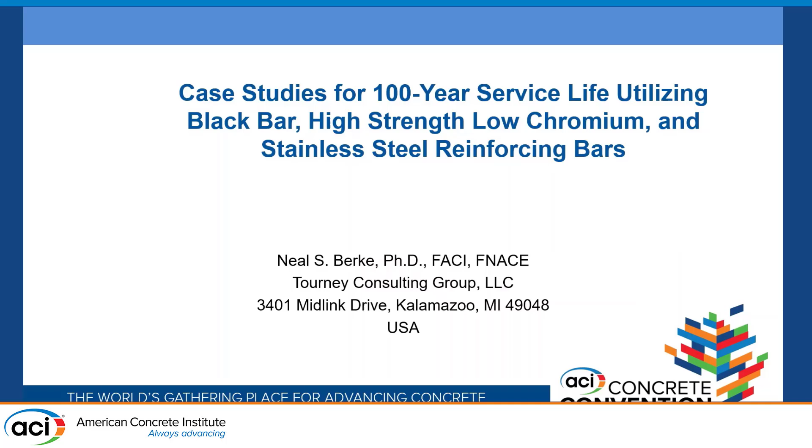So anyway, I'm going to talk about another aspect of Mike's work, where he worked on changing some of the bars that get used in the state of Virginia. And of course, some of these guys in the front row there did a little bit of work on that too. But I also spent a lot of time with Mike on other things.

So I knew Mike for over 30 years. It's close to 40, but I say over 30 because it makes me a little younger. And he was always trying to do his best for the Virginia DOT. I would come in. I worked for an admixture company. I was probably a snake oil salesman, coming in the door. But he listened, and he gave his concerns, and we had good discussions. And I've always appreciated that.

And like I say, if you came in with a new technology, he didn't throw you out the door. He just said, okay, show me how it works. Let me see how I can test it and see how it works. So he did a lot of testing, and he did a lot of looking at it. If they worked, he would use it, but only if it made sense for Virginia. Just because it's a fancy new technology, if it wasn't cost effective, it didn't make any sense to do it.

So I think he always had the state in his thinking, and I think everybody I know that worked for him really liked him too, which I think is important, because I never heard a bad word about him. I knew him for a long time, and I'm good friends with some of the guys that worked for him, so they would have said something if he wasn't a great guy. He is a great guy.

But as also mentioned, he shared his knowledge through participation. He didn't just stick to Virginia. A lot of people can stay happy in their company and not do anything. But no, he took an active role in ACI, which is why we're having this for him at ACI. And he also was very instrumental in TRB, as mentioned. From hearing many of his presentations and talking with him, I learned a lot, and I think that was the best thing about him. He was a great guy, and he made sure other people got a hold of his knowledge.

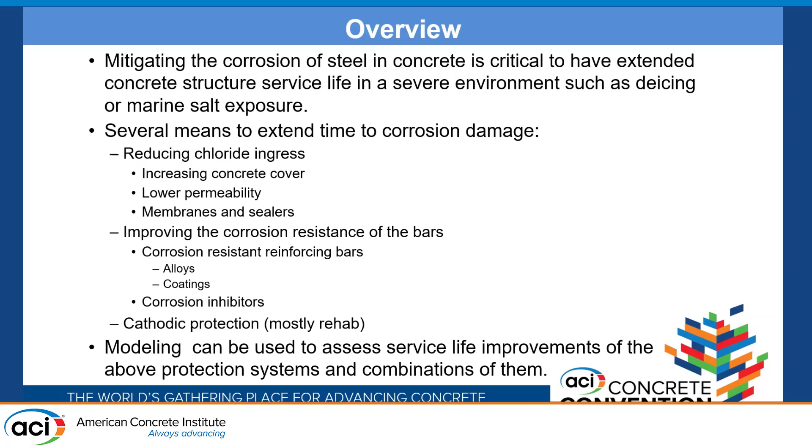You'll have membranes. You'll have higher performance concretes. You'll have corrosion-resistant rebars. You'll have inhibitors. You'll do the whole kitchen sink, because this is a monumental structure. In other cases, it's a little county bridge. You might use one or two of them. It's not as important, but Mike kind of knew where it was important and where it wasn't important, which I think is a good thing.

So today I'm going to concentrate on basically black bar as a comparison and chromium-containing alloys for bridge decks. These are the two new rebars that are currently being used in Virginia, depending on the environment, and do some service life predictions, and more importantly, use that to determine economic benefits. Why do you want to spend more money up front to use these things? It's quite apparent when you do this.

A lot of the data, I'm not going to go into how all the data got there, but a lot of it's based on our in-house testing and literature values. For threshold values, we use slightly lower values for deterministic modeling, which I'm using here, but you can use probabilistic models. With probabilistic models, you can get the chloride threshold to be a little bit higher, because they'll cover the lower values due to the probabilistic distribution of the chloride threshold values.

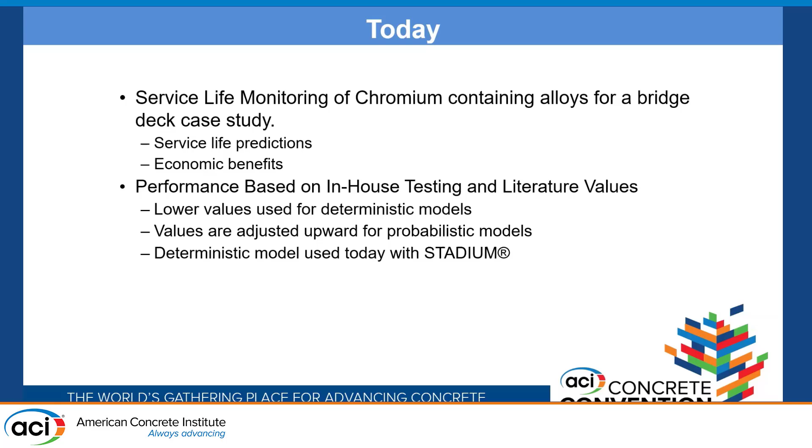And then today I'm using STADIUM. If people were here in Boston last fall, we had a session comparing the various models. If you use the models right and you get the right parameters, they all work. But today I'm just going to concentrate on STADIUM.

So what we're looking at is a black bar, which is normal carbon steel, ASTM A1035, 9% chrome, and another one that's 4% chrome. And the duplex stainless steel in this case was 2304 for this modeling. But you can put anything you want in there once you know the values of what they do, how they behave.

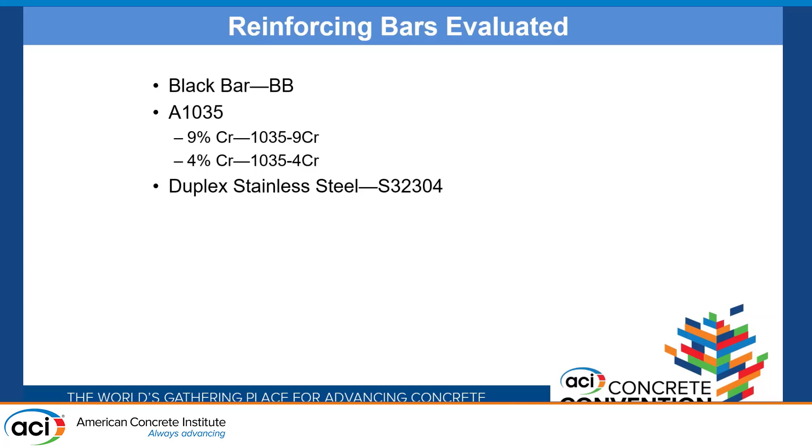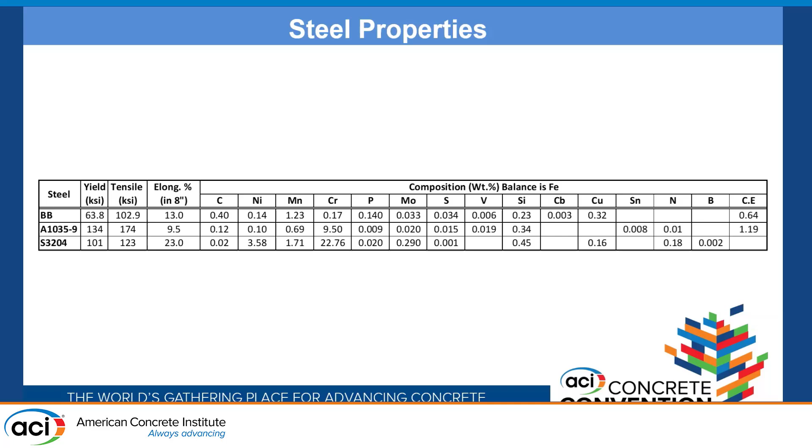The black bar, you can see the composition, no chrome in it, it's an impurity. You get to the 1035, you can see it's up to 9.5% chrome. In this particular alloy, if it got above 10%, then we'd be calling it a stainless steel, so it gets below that. And you can see the duplex steel has 22.76% chrome, 23% roughly. It's got higher other alloy contents in it, so it's a more expensive alloy to produce. But obviously, you do get something for the extra materials in there.

Now, I'm using a Midwest bridge deck as a comparison here. This is some of the data I had in hand, but we did samples with Virginia materials and Virginia locations and all over the country, all over the world for that matter. So it doesn't really matter, because we're trying to show how you go about it. The in-place cost includes cost savings of using less steel for higher grades of strength. I'll mention it now, and I'll mention it a little later on.

Those of you who are designing bridges, if you decide up front that you're going to use 1035 steel or the stainless steel, they have higher yield strengths. If you put that into your structural design up front, you can save some money on the cost of building that structure and give it better corrosion protection at the same time. Often they come in, the structural design's all there, and said, okay, you've got this cover, this concrete, this is what you've got to work with. Well, okay, but you can save some money if you use this in design. We don't want to redo the design, but ideally you really want to think about that.

We're looking at using STADIUM analysis once again to analyze the chloride coming in for 100 years, based on the exposure conditions and literature data from, as I mentioned before, in-house experiments for chloride initiation values for the reinforcing bars. In some cases, they might be a little bit conservative or not conservative, but you can change those as is.

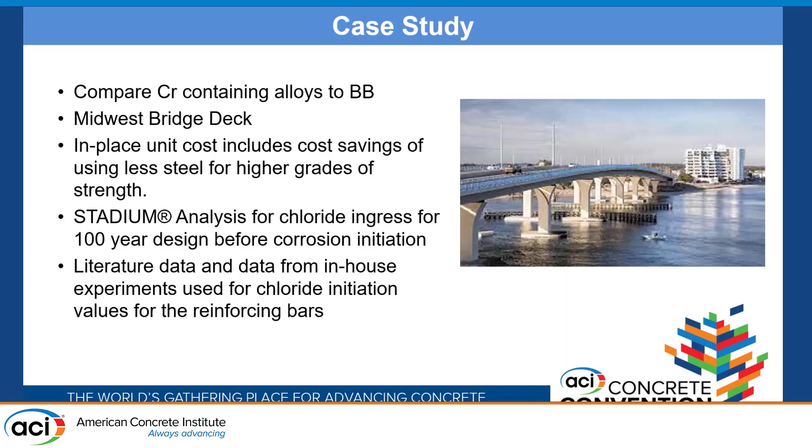So anyways, the first thing we look at is the black bar, and we're using a grade 60, which is the common one, threshold value of 500 parts per million chloride total in the concrete by mass of the concrete, and the propagation typically 5 to 7 years after corrosion starts. That also came from a SHRP study that I worked on with Mike and Richard Weyers, where they looked at bridges and it took about 5 to 7 years after corrosion started to start seeing cracking and spalling on the surface.

So I mean, it might vary from location to location, but that's a good number unless you have local data to say otherwise. And at today's prices, it's roughly 75 cents a pound for buying that bar. It might be more or less depending where you're at, but that's roughly the price.

Now, if you look at the A1035 with the 4% chrome, it has a higher tensile strength, which I showed before. The yield strengths are much higher, so you can use it as a 60, which is basically the same as the control bar. You end up with a higher threshold value, because it's not as good a cathode. It takes longer for it. The propagation's longer, and the price ends up being, on a direct basis,

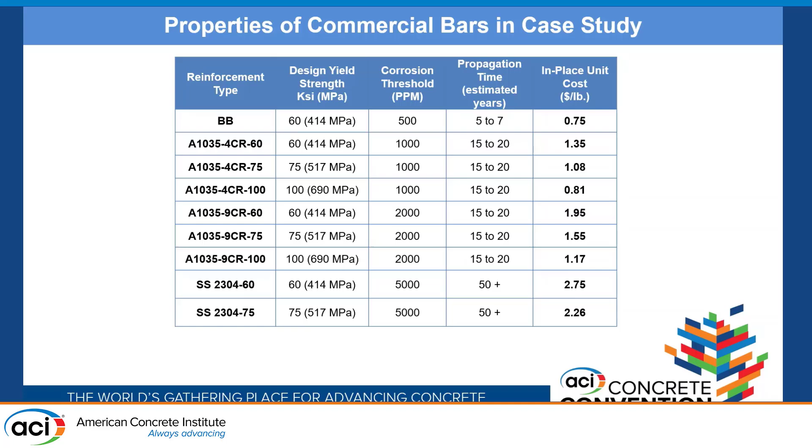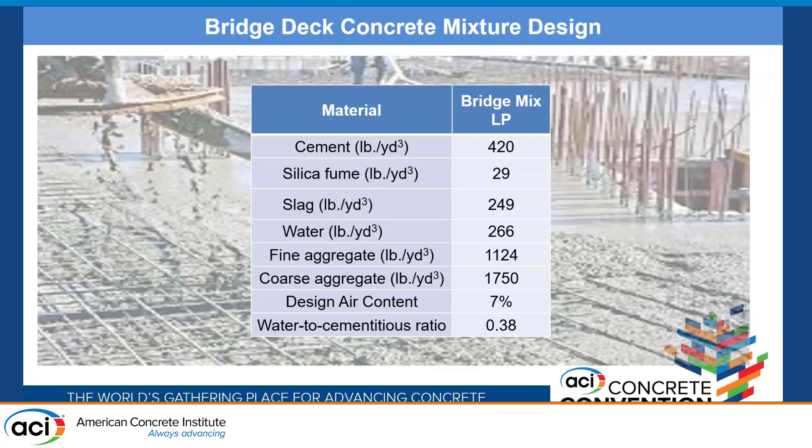So anyway, this is concrete. I mean, I felt pretty bad when I saw that, Mike, cement contents. This analysis was done a little before that. Usually we have it much lower than this now to get the paste fraction down, or they have to use an SRA or something to account for that. Usually it'll be less, but this is an example. Whatever mix you want to put in there, you can do it, and it'll just change the curves a little bit, and you work accordingly. So that's the mix we use.

These are the parameters from STADIUM that we had. That looks like it's a high number, but then it's multiplied by the porosity, and because it's on hydroxide, it actually ends up being a diffusion coefficient in the upper 10 to the minus 13 range, meters squared per second. So it's the same.

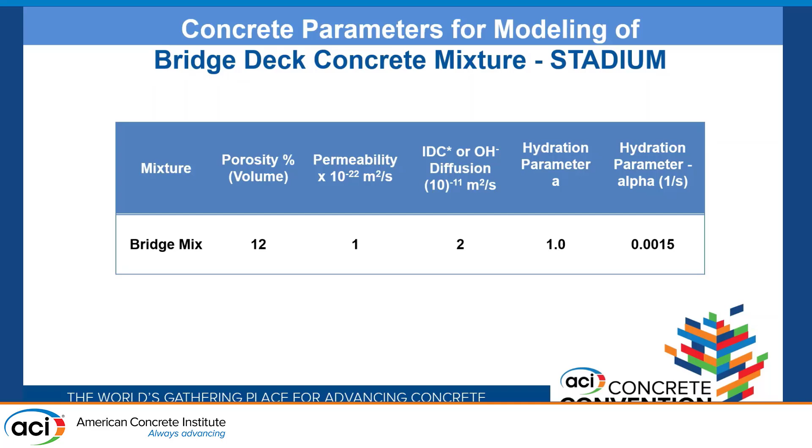So it's just how the modeling handles it. So that's extremely good concrete, and you don't necessarily have to be that good. And then you can see we do that. We come up with

percent chloride on the concrete on the y-axis, and the x-axis is years. And we have various lines. The upper line is with 1 inch of cover, which of course nobody does, but then we go to 1.5 inches, 2 inches, and 2.5 inches, which are more common.

The threshold line for stainless steel is above the charts; stainless steel would not be expected, at least for this concrete in this time period, to have chloride above the threshold value. The threshold value for the A1035 9% is that upper line up here, and other than 1 inch of cover, which nobody would use, nothing is going to get beyond chloride initiation.

I have a line for galvanized here. Galvanized bar would get you up to about there, and then this line here is for the A1035 at 4% chrome. And here's your black steel, and epoxy has a longer life. It has basically the same threshold value, but it goes out a little bit longer with propagation time. But I think as they found in Virginia, it's not going to get you much beyond 70 years, 75 years.

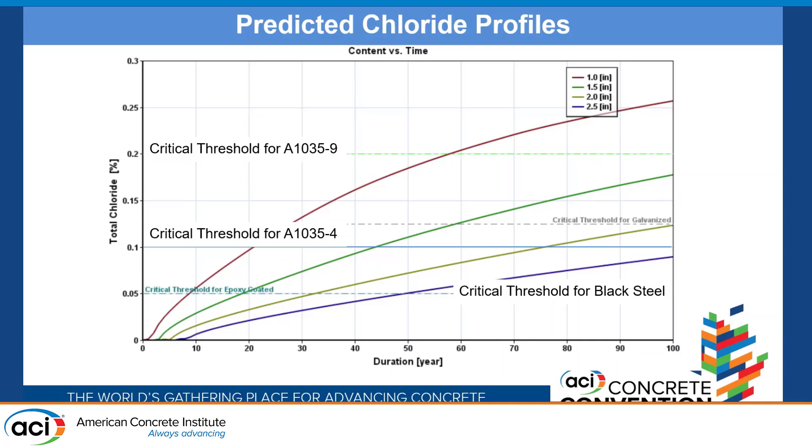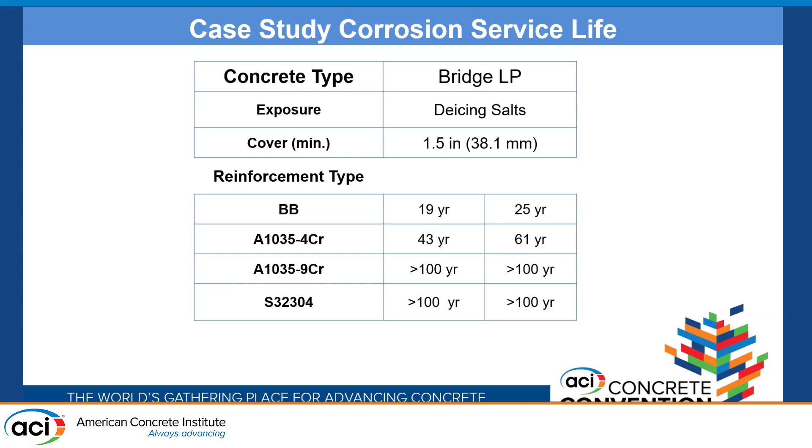Once again, looking at this particular example, the black bar had 19 years, with the propagation 25 years. The 4% chrome 43 to 61, but once again you can increase cover in both of those and get a little bit better performance. And of course the high chrome and the stainless steel did much better.

And you can actually look at the cost analysis on this. So the black bar was 75 cents a pound, but you don't have that much, 25 pounds per square foot of bridge deck. So it's got a low initial cost compared to everything, but your first repair is coming at a relatively early time, and you do a net present value cost analysis in today's dollars, and it's $12.91, and you add up all the other repairs in that 100-year lifespan, and it ends up being $46 a square foot.

The 1035 at 9%, with no taking advantage of the strength, comes out about the same price. But you didn't have any repairs in 100 years, so now you don't have traffic control and all the indirect costs. And for those of you interested in CO2, everything lasts longer, you're using less CO2, and the cars aren't sitting in traffic spewing out CO2. So altogether, you end up being significantly better off.

And you can see as you get higher and higher, if you take advantage of the strengths, the price gets even much less compared to that. And the stainless steel works, but it ends up still being more expensive.

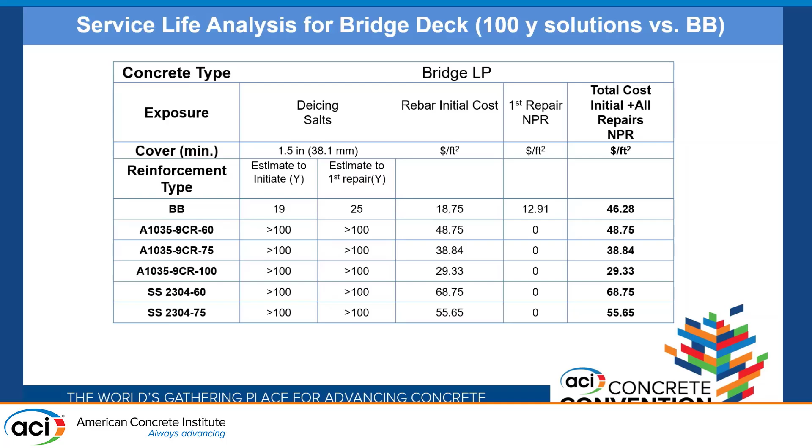So that's that. Just conclusions, because I know Mike's looking at me: you can have a lower cost than black bar when utilizing higher strength in the bridge design. You start adding user cost and traffic control, and both of these give a much, much lower cost than black bar. They could both reach 100-year service lives before major repairs would be needed.

Once again, designers, if you can, think about this when you're doing your design. You'll save money, and I know at least one case where somebody did that, and the DOT thought it was innovative, and they actually went with that project. So something to think about. And the main point here is that both of these are being used in Virginia, to no small extent due to Mike.